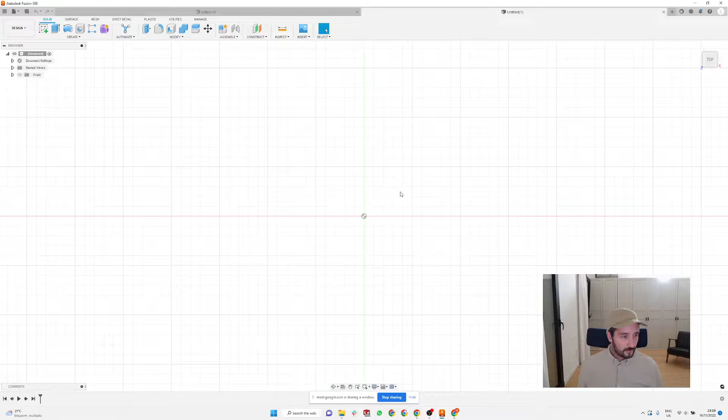Perfect, guys. So as I told before, I'm not really enjoying making sides, so I created a little bit of a system where I can just create one side, or several designs eventually, and quickly modify them so I can have a different width, different hinges, different length, and basically make it as fast as possible and play with the fronts, because that's more fun.

So we're gonna start as usual. I'm always starting with my stock material. I always need to know how big I can make the sides and if they will fit the material. So I'm gonna start here with a sketch, put it as usual on that little square, and create the rectangle in the shape of the stock material.

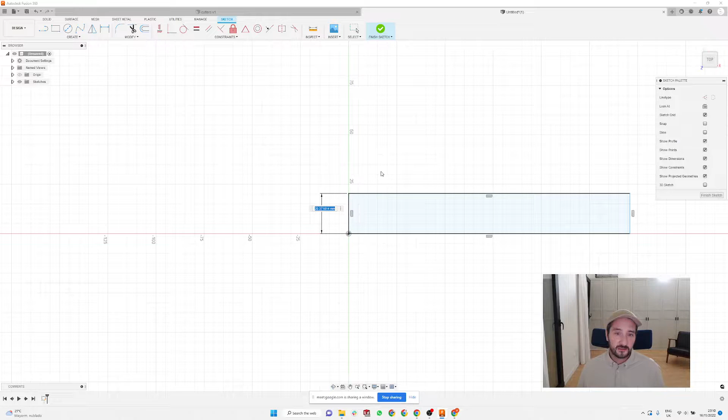And because I'm always choosing material in a 20 mil or 30 mil width, I'm gonna make that one 20, and most of the time the length is 160, because that's most of the stock material I'm receiving, so it's 160 to 170. So let's start with 160. So this is gonna be my stock. I'm gonna extrude it just literally almost nothing, like a film, so 0.01, and I'm gonna start playing with this. So on this one I'm gonna create another sketch.

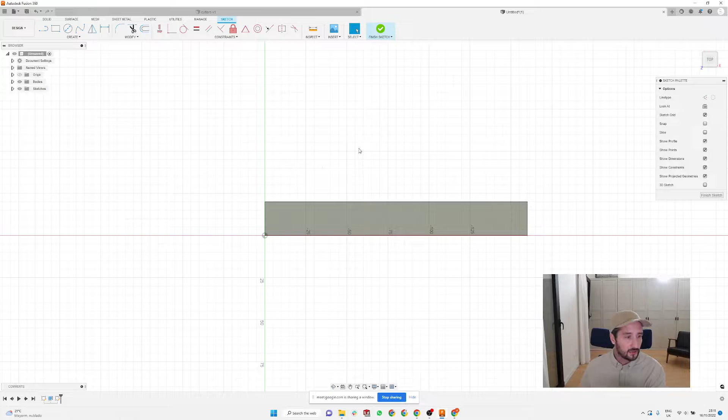It depends what kind of arms you're doing. So I can first show you arms that are symmetrical, so you can basically cut left and right the same shape and then just do a different engraving. And then I'm going to show you how to make arms which are not symmetrical, like the Ray-Ban arms with that little hanging bit underneath the arm. So this is going to be the symmetrical one.

And I'm always starting with a center line. So I'm going to select the line here. And if you go along this edge without pressing anything, when you are close to the center, it's going to show you that little triangle. That means you are in the center of the line. And I'm going to create this horizontal line across the whole stock material.

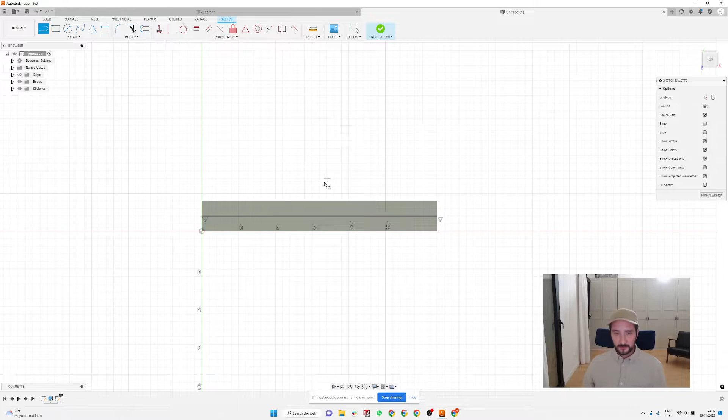Normally, when I'm doing some simple arms, I'm just doing this kind of shape: I go straight, then go a bit lower under a certain angle to taper the arm, then go straight again, and then create some sort of end, like the tip of the arm. So let's say something like this. All these 1, 2, 3, 4, 5, 6 lines were done with the line function.

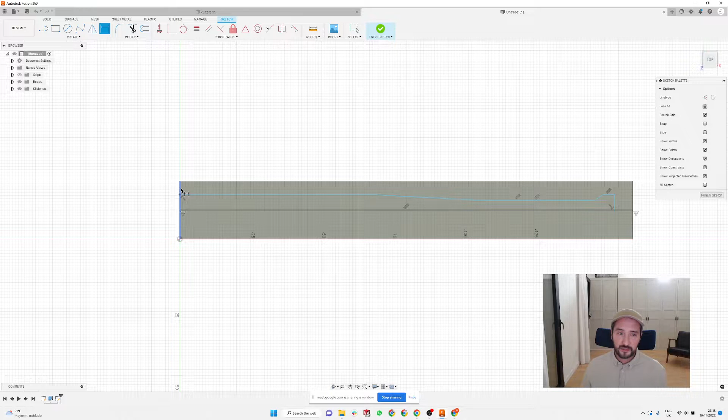This sketch is going to be quite complex, but it's going to be super easy to modify afterwards. So we're gonna put a lot of dimensions to it, and you can easily change them by just typing a different number. So normally I will go to the function sketch dimension and first say that this straight line I want always, let's say, 50 millimeters.

And then I want the area where it's tapered and thin, where you start bending the arm. I'm normally doing this from the point where it starts to be tapered till the end of the arm, usually 50 millimeters, so I have a little bit of space to bend it and have approximately 35 millimeters maximum for the hanging bit behind your ears. So this is going to be 35. Sometimes it moves a little bit when I do the sketch for the first time, so I can just move it back like this.

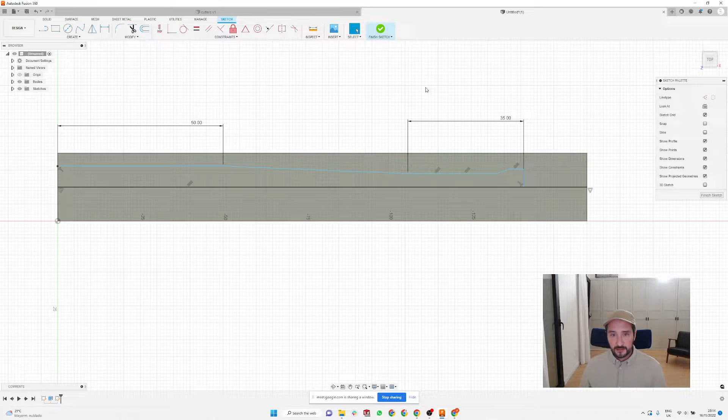And now I have the beginning and the end locked, and now I will create half of the hinge. So here I'm gonna create just 3 little lines. This is gonna be the half of my hinge. And eventually when we do the mirroring, I'm going to show you how to give this dimension. So this is kind of the super basic shape.

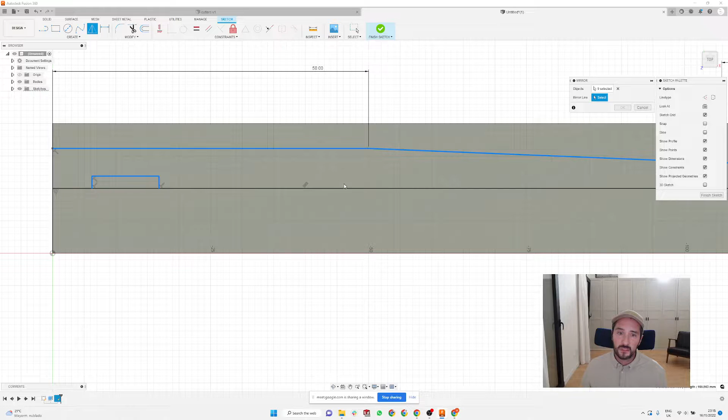And now I will do the mirroring. So this is the mirror function, and I'm going to select this line, this line, this line, this, and these three lines on the hinge. And my mirror line is going to be the center horizontal line.

So it's going to help you to visualize how the arms are going to look, and you can still, just by dragging these points, change the size, or you can go to sketch dimension and select this line and tell it that you want this to be, let's say, 10 millimeters. And it's always going to change the width, and it's going to be perfectly centered. So if you have the wire shoot in the center, there's no chance that the wire is going to be on the top or the bottom.

Then I'm going to select the tapered area, which needs to be quite thin, because if it's thick, it's quite a pain to bend it behind the ear. So normally I'm doing something between 5 and 6 millimeters, because that's the easiest to bend. So let's say 6 millimeters. And now this is like a quite long and tapered area,

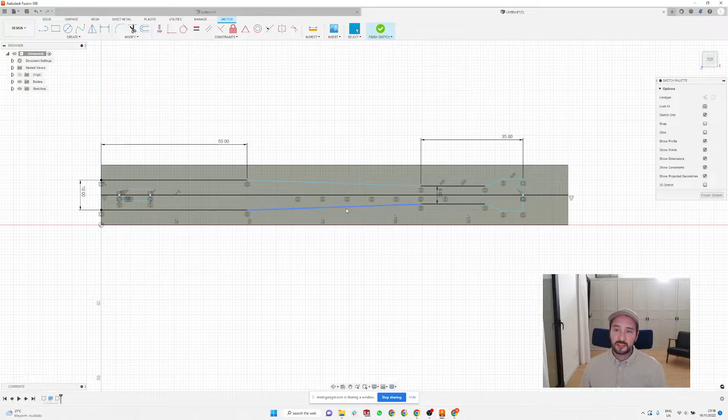and also here, we're gonna put the dimensions to the hinge. So I know the width of the hinge I want to use is gonna be 4 millimeters, and the length is gonna be, let's say, 8. Normally, if I have a stock like this, I'm always keeping the start of the hinge 6 millimeters from the end of the arm, so I have a little bit of area that I can do the mitering afterwards. It's quite important to have the hinge locked like this.

If you see that it's all black lines, it means that it all has dimensions.

Sorry, I'm gonna mute them. Sorry.

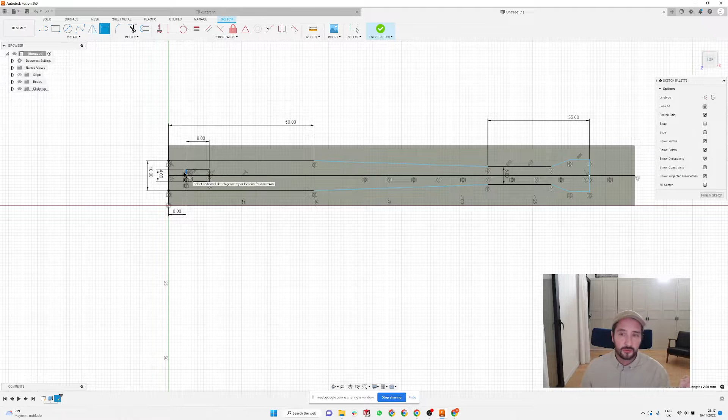And yeah, so now basically the hinge is locked in place, and from this point I can change the overall length of the arm. As you know, normally that little number of the length of the arms is measured from the beginning of the hinge, or from the screw, till the end of the arm. So I can make this dimension and put, let's say, 140.

And now I'm basically in a position where I have one design of the arm, and if I want to change it for a different frame, and I know it's going to be a small frame for kids or for ladies and it needs to be shorter, I can literally just type here 135, and it's going to change the size. So you can always play with this kind of stuff. And also, if it's gonna be a frame with a smaller lugs and it doesn't need to be 10 mil, you can just change it to 8 here, and all these things are always gonna be locked.

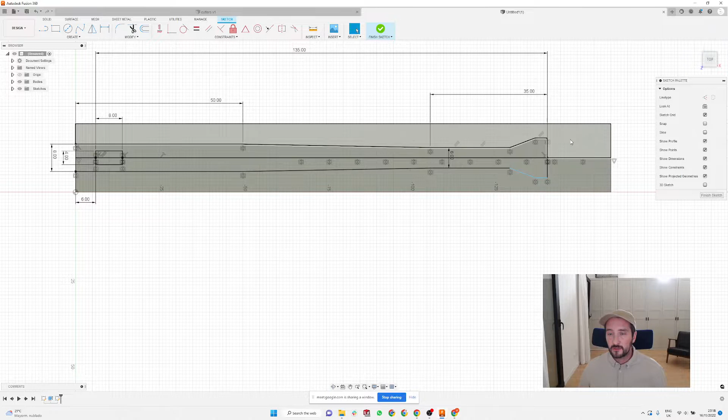And if you want this end of the arm to always be the same size, you can just add a few more dimensions here, to, let's say, the width of this end. I want this to always be 8, and the overall length of this bit I want 6. So now if you change it to 145, it's just gonna always stretch the arm and nothing else will change.

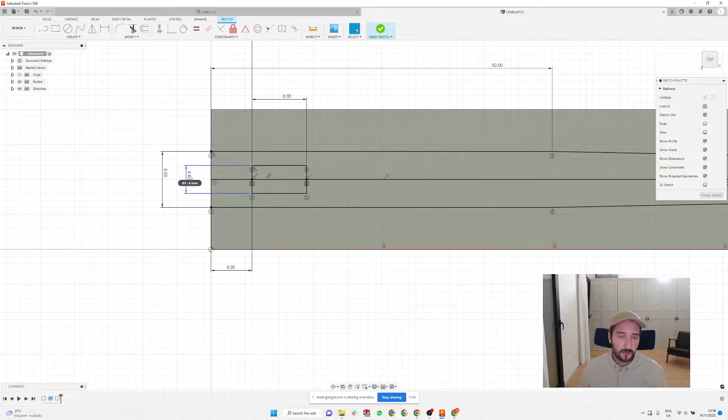So you can play with literally any size, and it's just changing one number, so you don't need to design much. If you want to use a wider hinge, instead of a 4 mil hinge you can use 5, and just change it again with one number. So the more you play with this sketch, the easier it's gonna be to modify everything.

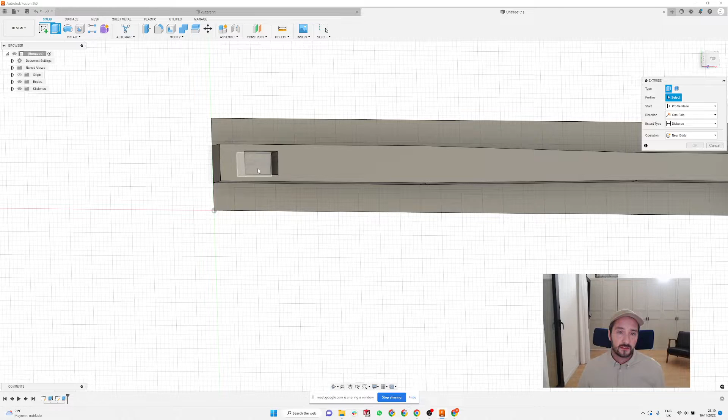Now we're gonna go to extrude, and we're gonna extrude this arm. So I'm gonna select the arm itself, and it's gonna go 4 millimeters high, like this. And this is the recess for the hinge, and I'm gonna add 3 millimeters because I want it to be slightly recessed. I'm gonna use the fillet function here and make the rounded edges, so it looks more like a recess for the hinge.

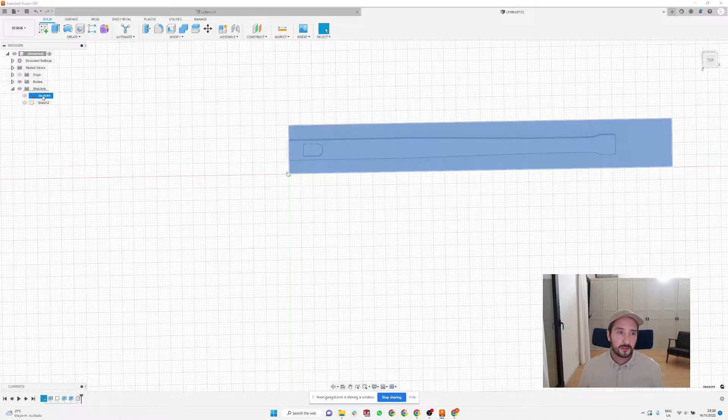So now basically you have your arm, and if for example you have a collection and you want to use different fronts, or the same fronts all the time, you can just modify it according to your frame. Just go back to your sketches here. So let's say this is going to be the stock and this is going to be your arm design.

So if you edit the sketch again, you can just change, let's say, this to 4 millimeter, or let's say 4.5 mil, and it's going to change that. Or if you want to change to 145, it's going to give you this length.

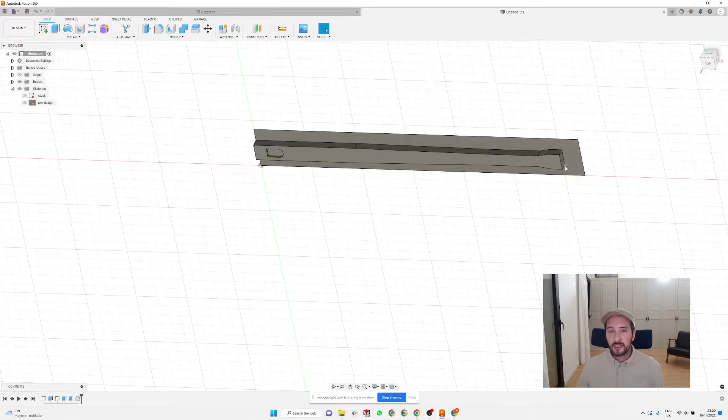You can play with all these rounded edges in your first sketch, but you can also do it here in a 3D operation. So you can make the edge here and here rounded, and don't worry, even now it looks like, because we make quite a harsh transition just with the lines, you can see now that it doesn't look very smooth, but when you actually make the arm itself, it's going to end up being absolutely seamless, this whole connection. So you can see it now, but eventually it's not going to be visible at all.

So that's one thing, how you can quickly design your arm. I'm going to now show you the next steps, how to prepare yourself a G-code for this. And the best way afterwards is to basically create one design of the arm and then copy the whole thing and redesign it, and create yourself a library of different designs, and then you can just design the front and find the best arms that will fit the design of the front, and then just choose it, modify the width a little, modify the length, modify the hinge, and you have everything else immediately done.

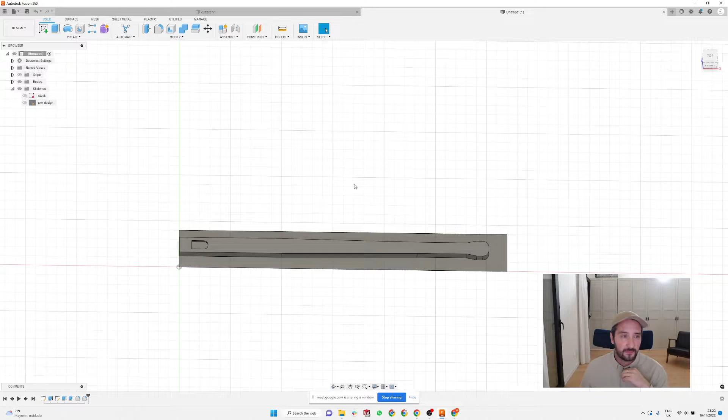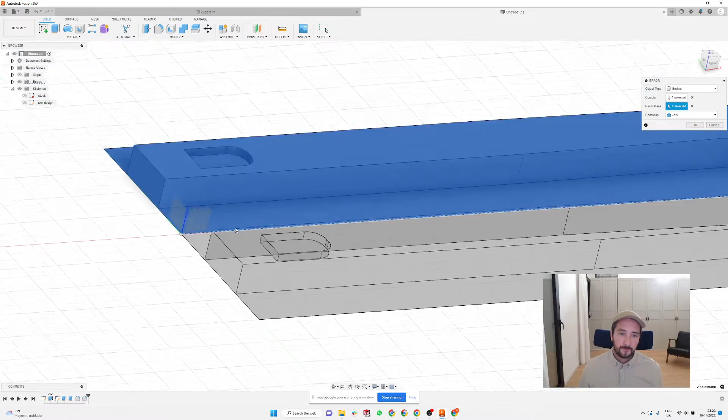So this is basically one arm, and normally I'm making them both, because I'm gonna have an engraving on a left and a right, so it's best to have two of them. So normally I go here to create, and mirror the whole thing. So press mirror. It's asking me here to select the body. I'm gonna select this, and the mirror plane can be actually this plane, or if you zoom a lot in, you can just click on this edge, and that's going to give you the mirror side.

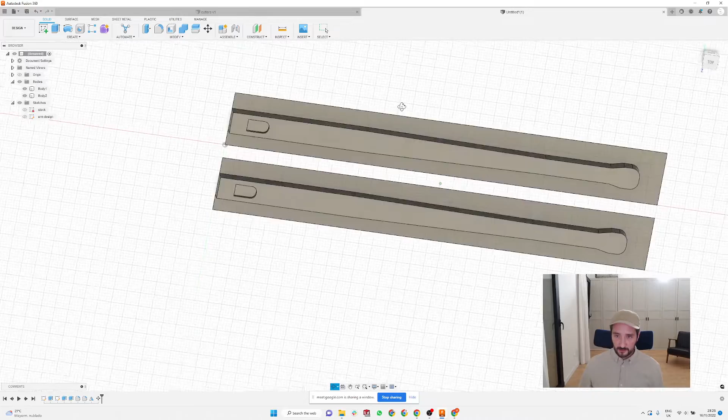Just here, when it's asking you if you want to join the operation, say that you don't want to join it, you want a new body, because you just want to have them separately. And you have a left and right, and normally I just don't like when they are touching each other, so I go here to bodies, select the second one, and go here to modify and move or copy, or you can press M and then just make a little gap, but you don't need to do that. But I just hate when I cannot see the gap between them. So at this point you have your 3D model, and we can now go to manufacture.

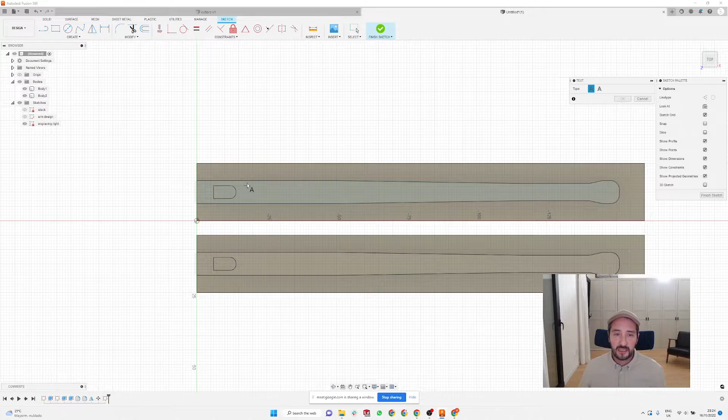I'm gonna first show you how to do the engraving. We need to create a new sketch, and we're gonna put it on the top of your arm here. Let's say on this right one. So it's gonna be engraving right. And here, if you roll down the create, you have here the function text. So now it's basically asking you to create a little box. So you just create some box here, and you can type here whatever you want on your arm. So it can be, let's say, brand name,

and here you can choose the font. It's basically linked to your computer. So whichever fonts you have in your computer, you can use that. So if you already have a font for your brand, you can just choose that, or you can choose from thousands of fonts here. I can choose just a normal Arial, and here you can choose the size of your font.

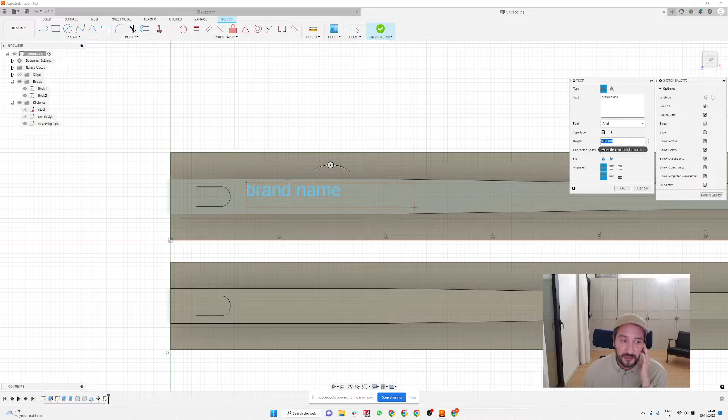Normally I'm not going smaller than 2 mm for the engraving, because it's a bit tricky when you do it on CNC. Anything smaller than 2 mm is going to be slightly distorted and it's not going to be very crisp. So for me, 2.5 is kind of the best size. And if you press OK, you can just drag it wherever you want on your arm. There's probably a way to mount it exactly in the center, but normally I'm just eyeballing it where it's approximately in the center, or where I want it.

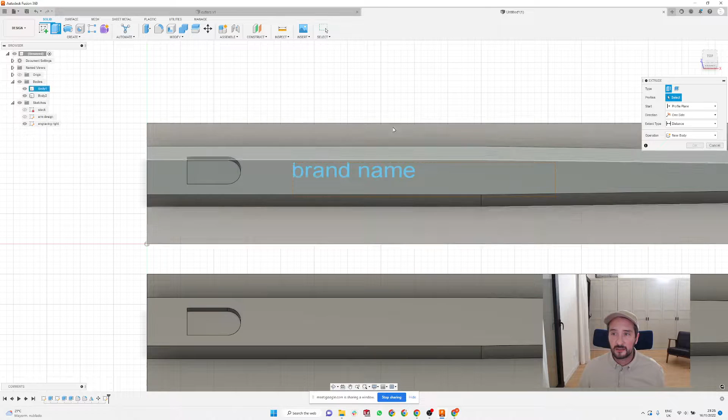And now you go back to solid and press extrude, and basically make that whole engraving. You need some depth. So I'm gonna extrude it minus, and normally I'm doing 0.4 deep, and that's gonna give you the engraving for your right arm. And normally on one arm you have a brand name, on the other one you can have the size, or it can be the name of the frame. So we're gonna create another sketch and put it on the top of this arm.

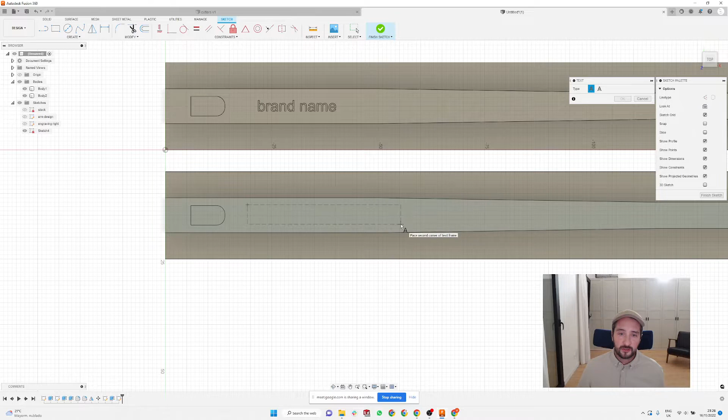Again, here create text, and you're gonna create your box, and let's type frame name. Again in the same 2.5 mm, press OK. But because it needs to be mirrored, the best way to do it is double click now on your engraving, on this text, and you can see here this little ball and a circle. So you just do a 180 degree turn, and that's gonna give you the engraving for the other arm. So now it's gonna be properly left and right mirrored.

And you can do here extrude. Just click on a text till it's blue like this, and minus 0.4. You can always modify the text. I'm gonna just type it here. Engraving left.

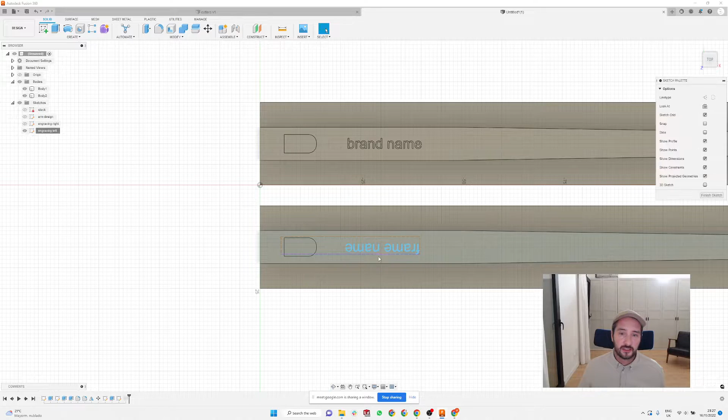So if you want to modify it, here you have those two sketches. So you can go here, edit sketch, and you can just type whatever you want, and it's gonna make the same extrusion again. So if I type frame name number 2, press OK, and finish sketch, it's gonna make the whole extrusion with the whole text. The only thing that you need to do when you're changing the text, you just need to again drag it somewhere on the arm where you actually want your engraving. You can have it normally here next to the hinge.

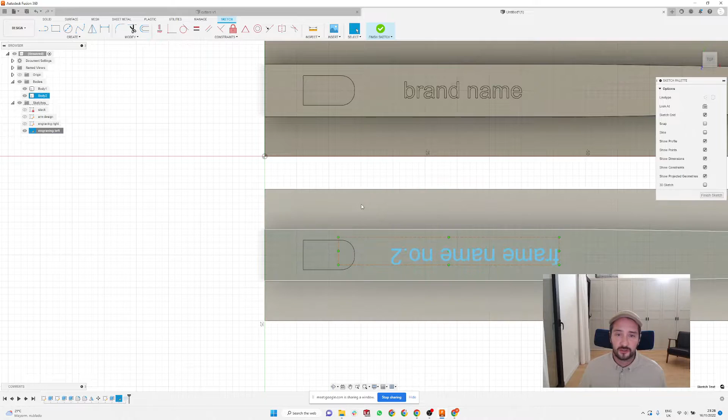I always recommend you to have at least 5 or 6 millimeters away from the hinge, because when you're cleaning the engraving, or if you fill it with paste or something, if it's really close to the hinge, it's quite hard to clean it, and sometimes you're gonna scratch your hinge, or it's a bit tricky. So I always like to leave a little bit of gap from the hinge. And that's basically it. That's how you can make your arms and the branding.

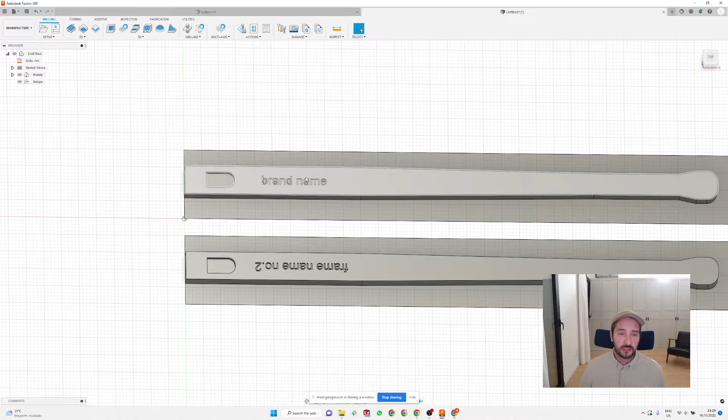And now we're gonna create data for CNC out of this. So you're gonna go from design to manufacture, and we're gonna create 2 setups, one for each arm. Even if it's symmetric, you don't need to export the G code for cutting separately, because the cutting and the recess for the hinge is gonna be the same for the left and right, but you need to export different G codes for the left and right engraving. But I'm gonna show you how to do it.

So we're gonna create a new setup, and automatically it will select everything you have in your work area right now. But you just want to work with the one arm. So here in the model, you can select just one body. So you just press select and click on one of your arms.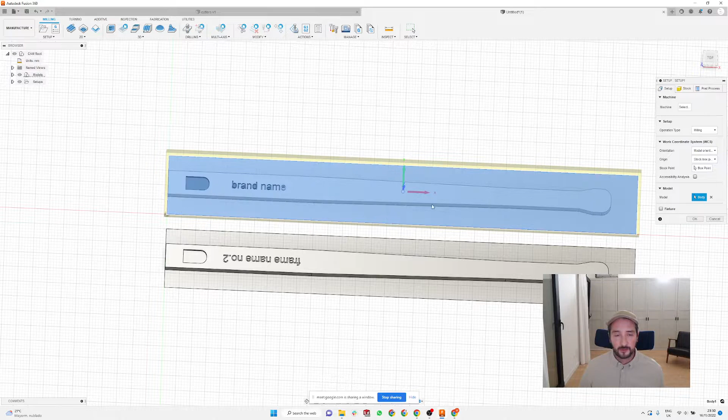And normally it always jumps straight to the center of your material and the center of your arm. My recommendation is, if you're doing arms, don't start from the center, because first of all it's kind of hard to find the center of the arm. I'm always starting on a left edge. So here you have an origin, and if you roll it down, you can click here on the model point box, and it gives you a few different points. It's usually the corners, top, center and bottom, and the centers of every single side. So my point is always on the edge and the center of the arm.

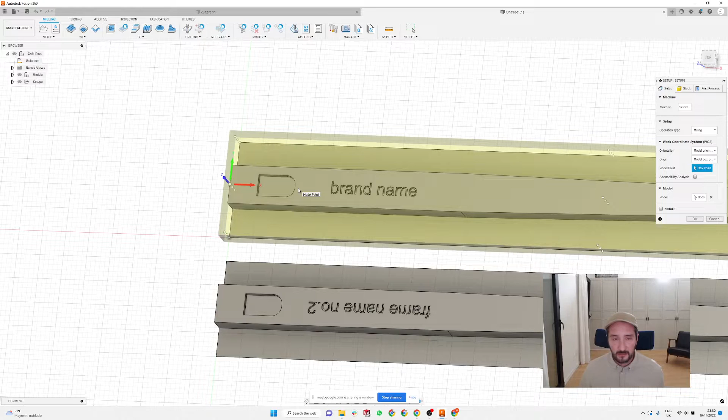I found it quite useful, because quite often when you do this yourself and you don't have every single arm the same length, or you don't have the same length of material, if you set up this point, it doesn't really matter how long your arm is going to be, because you're going to have more or less material at the end of the arm. So I recommend you to always click here.

If you go to the second tab here, stock, it's recommended to always have a little bit of extra material, but you don't need that. So instead of 1 and 1 here, you can have 0 and 0, and you can see the stock dimensions of the material. It's 160, 20 and 4.01, so basically 4.

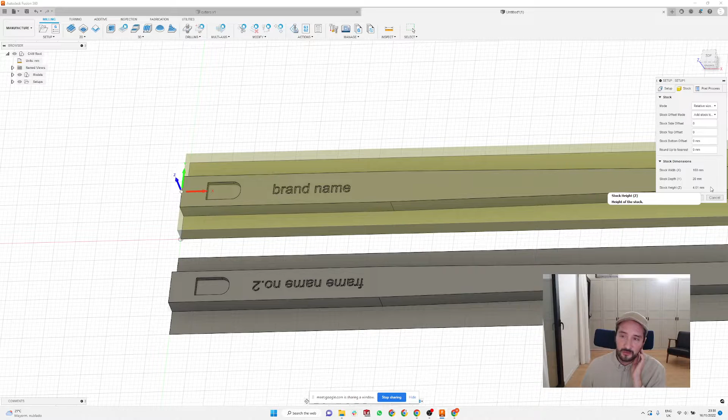And that's it. Now you have the prepared setup, and now we're going to do the operations for milling of each of these things. So we're going to start with the hinge. For the hinge, I'm using the function 2D pocket. So we're going to click on that.

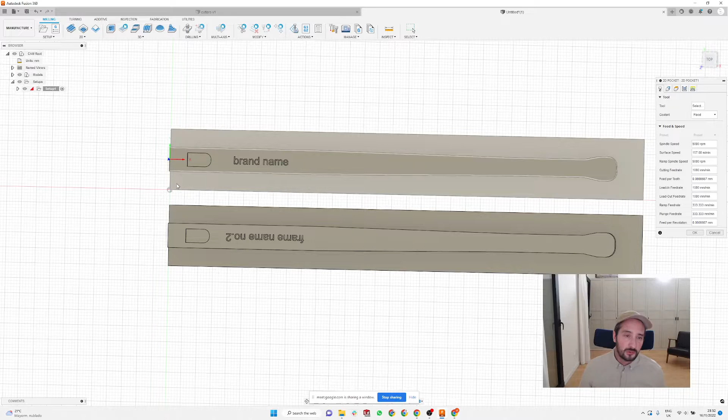The same way like we did the front, we need to first select the tool. If you want, you can use the same tool that you are using for cutting fronts, which was 1/8 inch or 3.175. But normally I would recommend, if you're cutting arms, go for the smaller cutter, because if you have a 20mm material, you need to have space for the cutter to actually cut this shape. You cannot fit a much bigger size than, let's say, 6mm, because you need to have 2mm on the top and on the bottom. So I would recommend you use a 2mm cutter.

So we're going to press here on tool and create a new tool. It's going to be again the flat mill, and here the diameter is going to be 2mm. The rest of this information is not really important. Shaft not important, holder not important. For the spindle speed, if your CNC machine communicates with your G-code about the speed of the spindle, I would put at least 10,000 RPM.

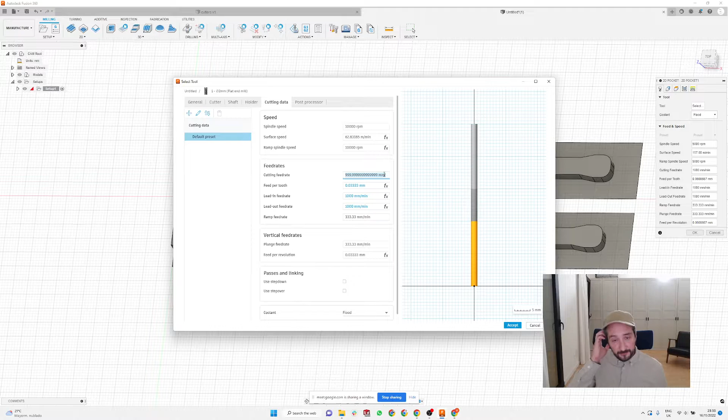And the cutting feed rate, with a 2mm cutter, I'm usually doing something between 500 and 1500 millimeters per minute. So let's be a little optimistic and put, let's say, 750, and the rest is automatically calculated. So we can use this tool and select, and here in the geometry it's asking us what we want to cut. We want to tell the CNC to cut on the bottom of this recess for the hinge. So it needs to be filled with blue and with a blue outline.

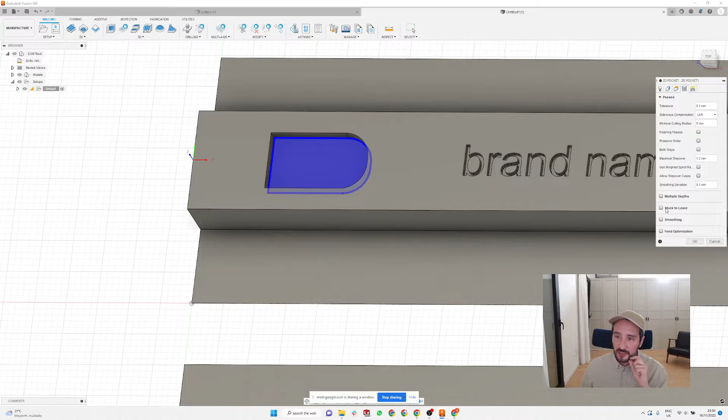The heights are not important in this operation, and for the passes, just be careful, because every time you use the 2D pocket function, it always gives you stock to leave. So I would unclick that, because stock to leave is basically going to make it 0.5mm less deep and 1mm overall smaller. So I will just delete it completely.

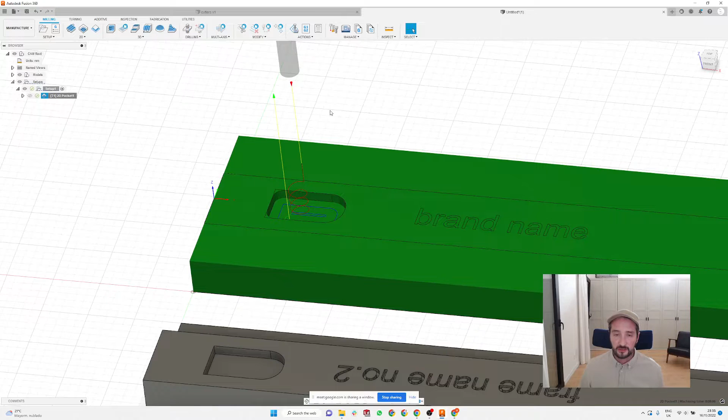And here in linking, there's one annoying thing: it automatically gives you a helix, which means the tool is going to go down very slowly into the material. I'm going to show you. You can see that red line is going very slowly down. It takes absolutely forever and it's annoying. So if you go back to edit, you can keep the helix but change the ramping angle from 2 degrees to 10 degrees, and it will go down much faster without potentially damaging the material or tool. So that's the function for the hinge. It's very similar to what we did on the front.

The next operation would be cutting the outline of the frame of the arm. For that I'm going to use the same 2D contour that we were using for the lenses and for the outline of the frame. We already have the 2mm tool, that's good. We have 750 speed, that's okay. And now I'm just going to select this line.

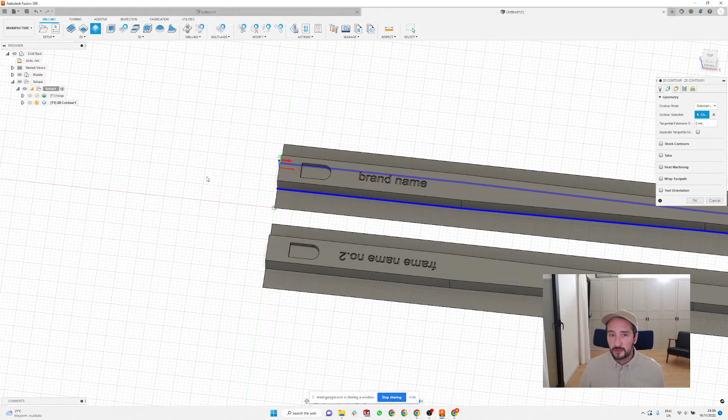As you can see, normally if you didn't have this stock material on the bottom, it would also cut here on this edge, which is tricky because normally you have the wire here, maybe a little bit sticking out, and most of the time you will break your tool in that area. So if you have stock material and you click on the outline of your arm, it's just going to cut on the top and the bottom and around, but not here on the front. So it's very safe for cutting.

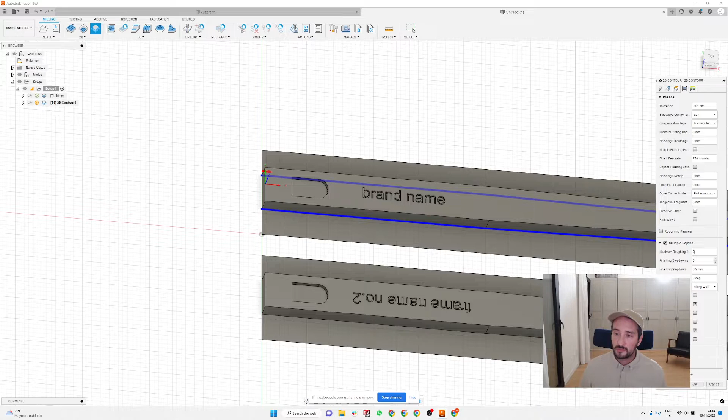And with the passes, I will go multiple depths, as it's a 2mm tool, I wouldn't go deeper than the diameter of the tool. So I will go 2mm deep for each pass. As you can see, now we have 2 passes and it's always stopping on the edge of the material. For me this is quite important because I don't want to break my tools.

And the last operation here is going to be the engraving. If you don't have a CNC with automatic tool changes, I would recommend you create the code for the engraving now, but never export all the operations at the same time. If you start cutting your arms, just cut them all out and then do the engraving afterwards, because if you need to change tool every single time between arms, it's going to take you absolutely forever.

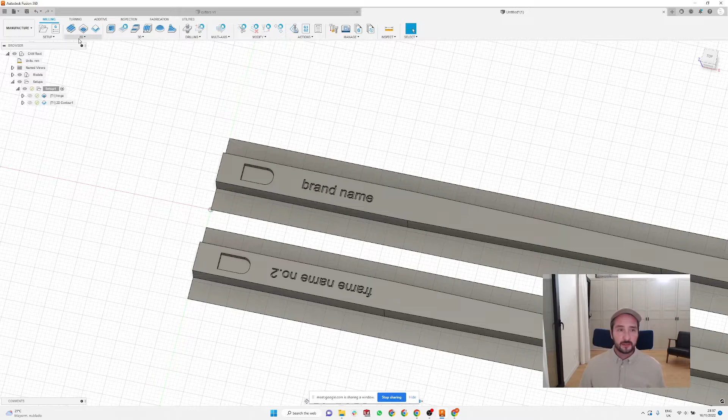And with the engraving, it's a bit tricky because Fusion is not recognizing this kind of operation as engraving, so you need to convince it a little bit that you actually want to do engraving, and you need to set up a new tool for that. So we're going to use the same operation as the hinges. It's going to be 2D pocket, and we need to create a new tool. So we're going to press here select and create a new tool.

And then just quickly before, for engraving I'm using these kinds of tools. These are very simple and super cheap engraving tools for any materials, for metal, wood or aluminium. I can recommend you to get this one, which is flat on one side, and the angle of the engraving tool is 10 degrees and the tip is 0.1 millimeter. So it's one of the smallest ones you can get.

If you look at Amazon, they are that cheap. I recommend you to get a lot of these, because every time you make even a tiny mistake, or if you want to find the zero Z, you can very easily break them. So they are quite fragile. But Fusion doesn't have this tool; you cannot create this tool in the library.

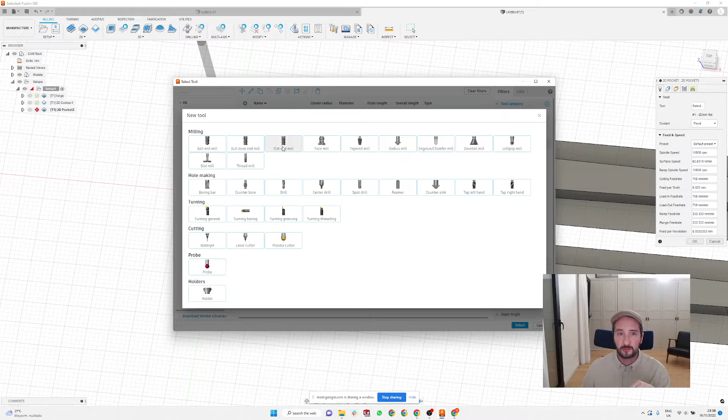So I'm going to go back to 2D pocket, select, and instead of having the tapered shape, I'm just going to create a flat mill. Fusion will think that it's just a tiny straight mill. So I'm going to use this and tell Fusion that the diameter of the cutter is going to be 0.1 millimeter. And you don't need to care about the rest of these numbers.

For the cutting feed rate, it all depends how good your CNC is. If you have a very rigid and very accurate CNC, go fast without any issues. But because it's going to cut such small areas, it's better to go slower, because you're going to get more accuracy. So I would recommend you to go 500.

And also for the speed of your spindle, because sometimes it happens with different materials, for example, if you have a black material and you do engraving, because it has a lot of pigments, it starts melting the material instead of cutting it out. It looks like it's cutting your letters nicely, but it's actually just melting the acetate right behind the cutter, so you cannot clear out the letters afterwards. So I would recommend you to go around 5000 RPM, not faster, to prevent the melting of material.

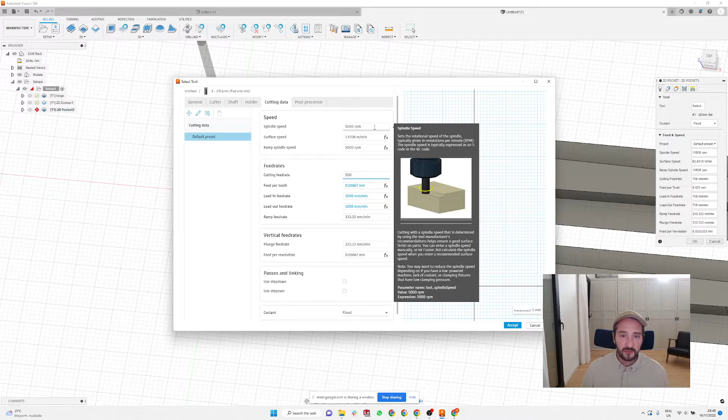And that's it, you can accept. And we can now select, instead of 2mm, the 0.1mm cutter. And we go to the second tab, and we need to select every single letter, which is a bit annoying, but it doesn't take forever. Just be careful when you're selecting the letters.

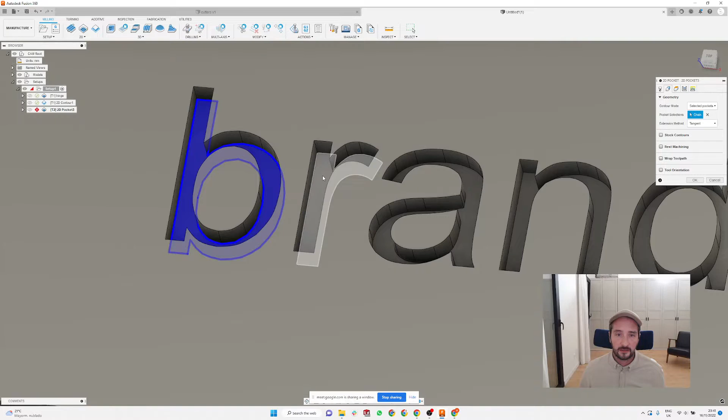Always be careful not to select the top edge of the letter, but always click on the bottom of the letters. So basically where you want your cutter to cut, always select the bottom. It's quite visible, because if you click on the top edge instead of the bottom, it's going to look slightly different, so you can see it immediately. So I'm going to do it again. And you just select all the letters.

And here there's one thing that I would recommend, because it's a 2D pocket, it automatically also leaves some stock. So you need to unclick that because you don't want that. And for linking, if you have a typography with very thin letters, it's always good to remove leads into the material. So unclick lead in and lead out completely, so it will go straight to the letter and start cutting. It's just a little tip that will help you a lot.

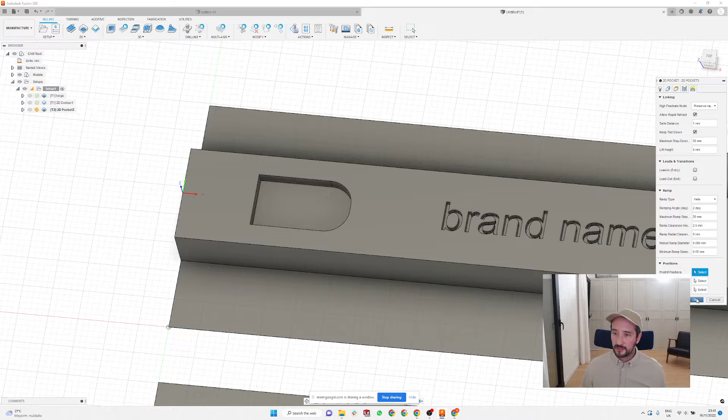And if you press OK, now you can see, I forgot here, same as on the hinges, there's a ramping of 2 degrees, but you can change it to plunge, so it will go straight down into the material. And now you can see that it's clearing all the letters nicely. It's making more steps to clear it, but I realized, especially with black and very dark colors, it's good to have all these steps, so it's going to look nice and crisp when you cut it out.

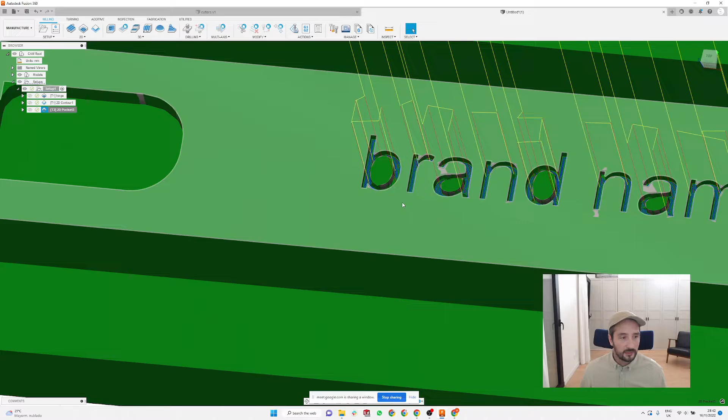So that's basically engraving, and it's right here. There's one trick I can show you. You can see it takes quite long, because it always cuts one letter and goes all the way up and then down, all the way up and down. So all these yellow operations are taking absolutely forever.

So if you go back to edit the operation of engraving, here you have the heights. We never so far opened that tab. It's basically telling you that between the steps in the letters it's going to go 5 mm up and down, and between the letters it's going to go 10.

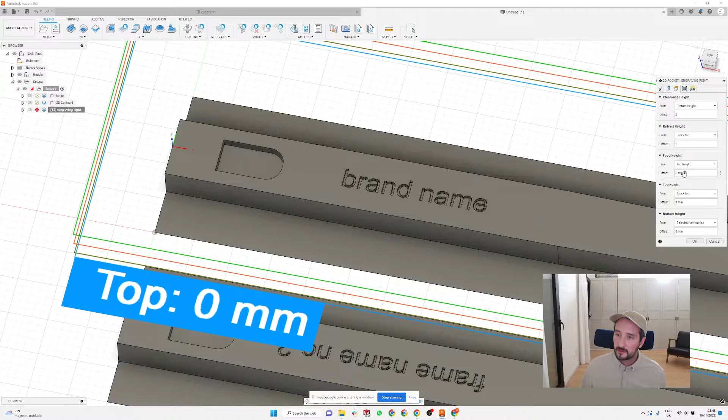So normally I'm changing this to 1 mm, or let's say 2 mm. Here I'm going to change to 1, and 1, and here, the clearance height, I'm just going to change to 1 mm. So it's now going to do literally small jumps between the letters, and it doesn't look like a big thing, but this can save you 3 or 4 minutes on the whole process of engraving. So you can go from 7 minutes of engraving to 3 or 2 minutes.

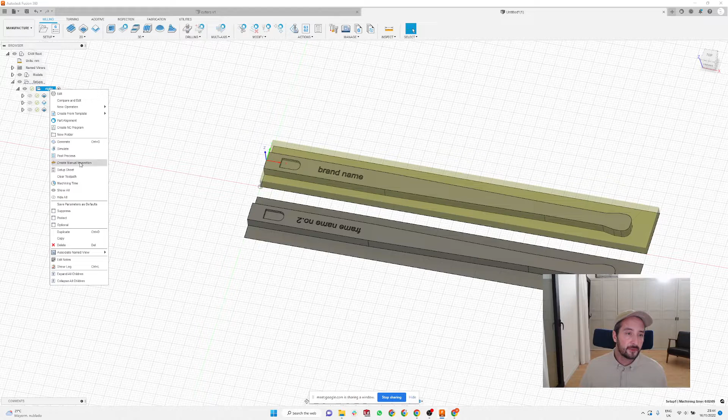So now basically we have the whole right arm done. And because you need to do the other one also, I'm going to rename this one right. And if you right click on this whole setup, you can press duplicate. And you have here now basically the same setup, copy paste. So I can rename it to left, and I just need to right click, edit, and tell it that we're not going to use this body anymore. So I'm going to delete this, and tell it we're going to use this one.

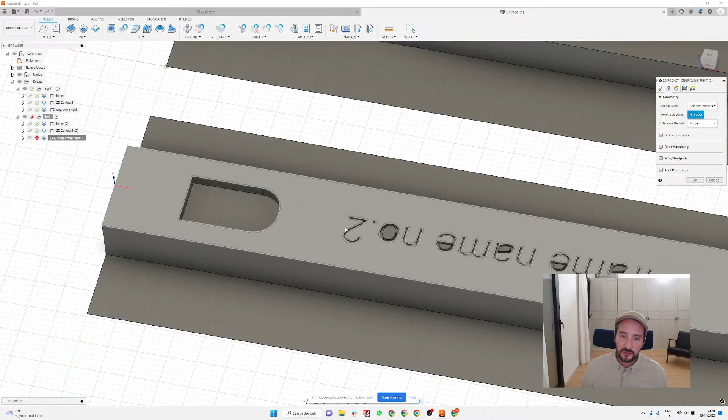And here again, edit. It's the same thing like when you're copying the setup for your front on another frame. You're going to select the geometry, delete the old one, click on the new hinge. That's done. Then you have a contour, again, geometry, delete, and click on the other contour. And with the engraving, the same thing. Click here, geometry, delete, and select all your letters. Here, here, here. And you have the engraving for the left and right basically ready.

So from this point, I would use this as your template for arms, and every time you design a new arm, just do the 3D model and then copy all these operations, because you will know that these operations will work and it's not going to give you any issues. You don't need to play with all these setups that we did for engraving, like with the heights and everything. So you can always copy paste it.

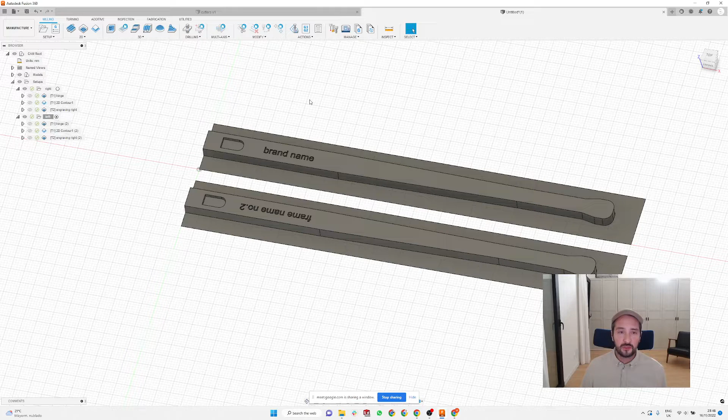And if you have a new frame, you can always copy the whole arm, both arms, as when you have here your materials. Okay, class number 5. I'm going to save this one as sides 01. Sorry, I think the screen disappeared, but I just saved it here on the left side as sides 01. And if I'm going to do a new frame and I know that I want the same design of the arms, I can just right click here on these arms, copy in the same folder, and rename it based on your frame.

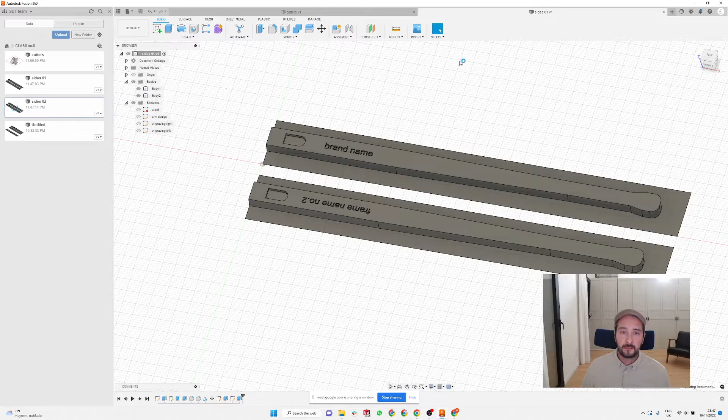Open them, and if I know that this is going to be the larger frame with the bigger lugs, I can just change it to 11. And I know I'm going to use 6mm hinges, and I have basically now a new arm that I would otherwise spend time to design. So at this point I can just take it, modify whatever I need, and if I go back to manufacture, I already have every single step prepared. So it's going to be much faster. It's going to take a while, probably a month, to get all your arm designs ready, but afterwards it's going to be super quick.

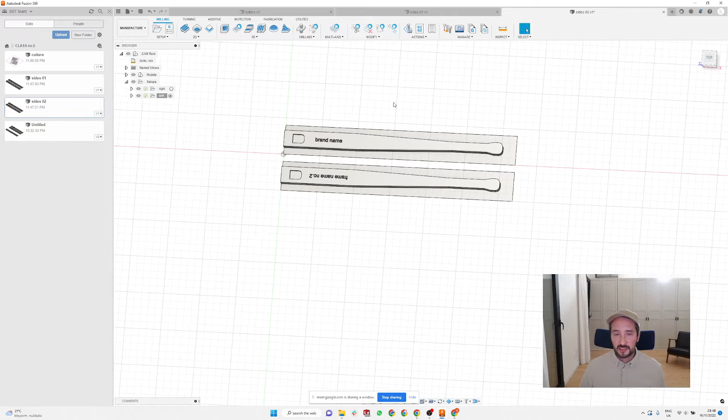So this is how I'm doing my arms. Sorry for this design, it's not exactly nice, but you can use your own designs and make something nice. And I'm going to show you now something a little advanced, when you want to do asymmetric arms. So I'm going to start with a slightly larger stock, and I'm going to use 30mm. So I'm going to create stock material for 30mm. So it's going to be 160 and 30.

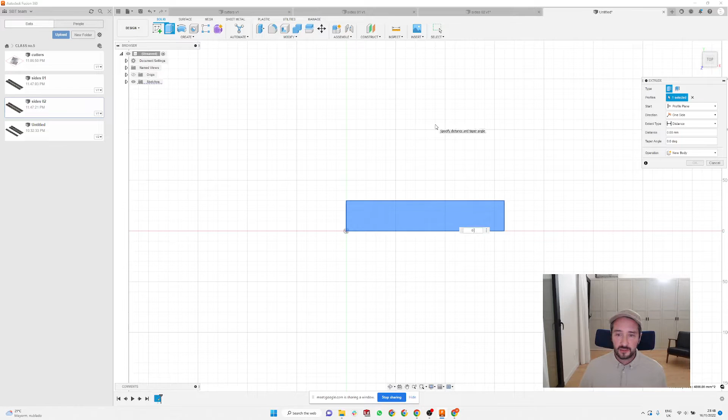I'm gonna extrude it 0.01 and create now another sketch. And start with the center line, and I'm going to try to recreate that like a Ray-Ban arm that has that little hanging bit.

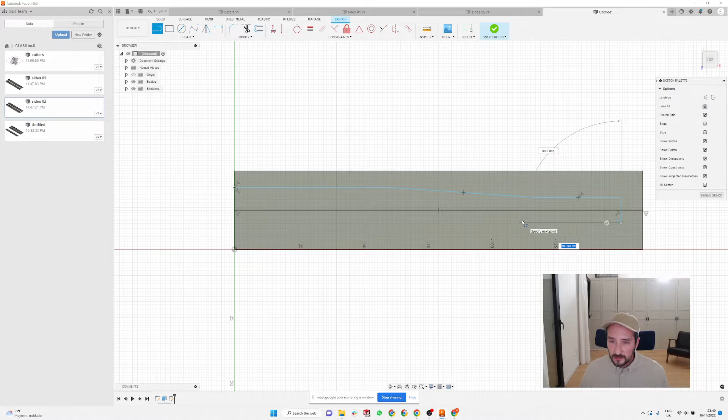So I'm going to start with a straight line, then do a little bit of tapering, and then let's say it's gonna be like a little, and I can make this straight and down. So I'm not gonna do mirroring now because it's not gonna be the same. I'm gonna make this longer than previously, and then this long hanging bit, and go back to the beginning.

So now it looks horrible, but I'm gonna show you one trick when you're doing this kind of stuff, and you want to use the same function when you just change one dimension, and it's gonna be perfectly centered according to your midline. So if you press here the sketch dimension, and you want this end of the arm to have 6 millimeter, you can make it 6 mil. But now, as you can see, it's not perfectly centered to your center line.

So there's a little trick. If you press again the sketch dimension and you select the top line and your center line, it's gonna give you some random dimension. But you can click on that dimension and basically create an equation, double click on the dimension, and then it's all selected. So you can now click on this dimension, and it now knows that it's looking at that 6 millimeter overall width, and you can just press divided by 2, and it's gonna center it perfectly.

So if you want to change it to 5, it will automatically calculate that this dimension needs to be 2.5. So it's a little trick that will help you eventually when you start playing with different shapes or more complicated shapes, so you don't make a mistake.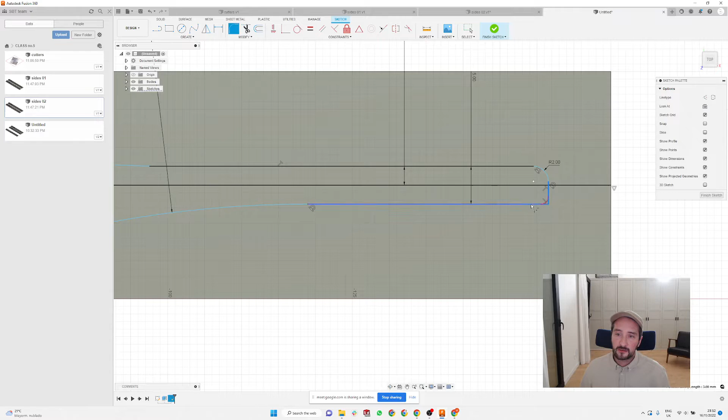Also, if you want this end with a radius, it's a bit tricky, because Fusion is not allowing you to do a perfect radius. So you can just make the fillet here, and then type 2 millimeter, and here also 2 millimeter, and it's going to give you that end.

We can make here the hinge, and again it's going to be a width of 4 millimeter and a length of the recess 8 millimeter. But as you can see, it's not sitting perfectly in the center, so I'm going to use the same thing. I'm just going to go from the top to the center and tell it I want the overall width divided by 2.

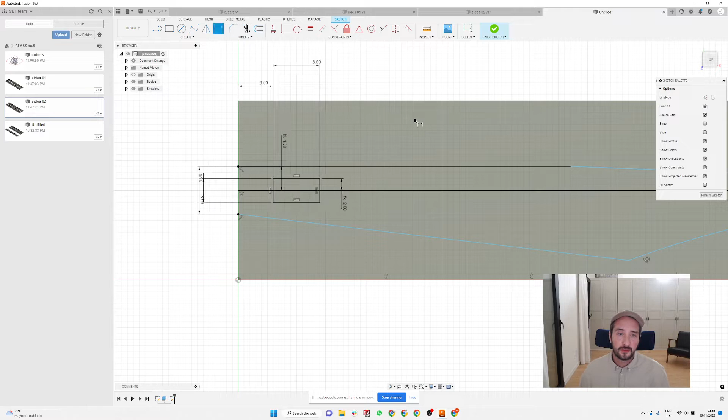Then best to put it 6 millimeter from the end of the arm, and here you can put the overall length of your arm from the beginning of the hinge to the end of the arm, 145. So this is going to be again all adjustable. So if you want to change the width, it's going to be this.

Sorry, I came out of the picture.

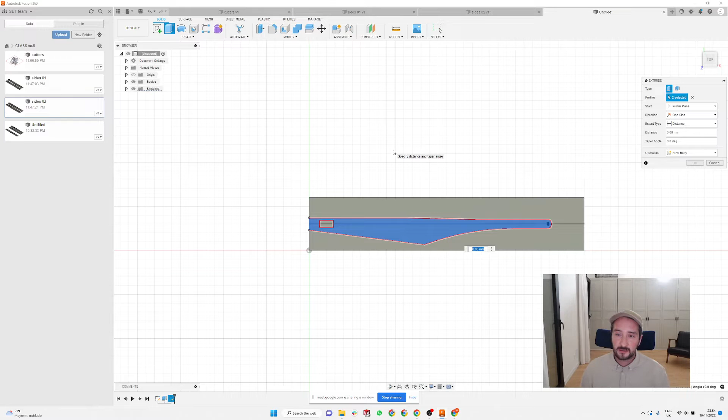So you can change it here to, let's say, 7 mil, and you want 135 overall. It's going to change the whole thing. And I can extrude it now. I can extrude this and this, 4 millimeter, and extrude this 3 mm and create here a little fillet.

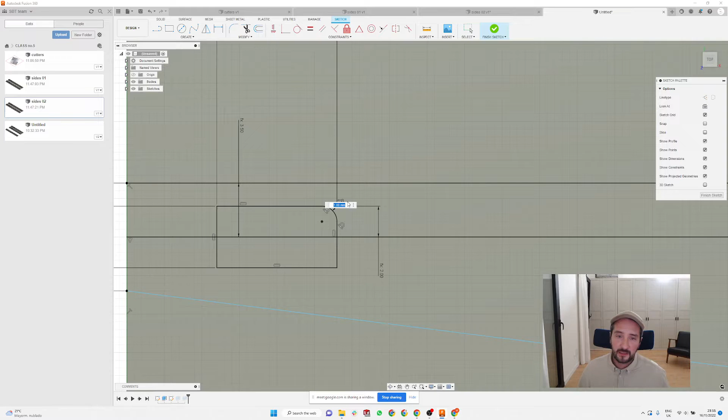But I would recommend, it's a bit tricky, or a bit more of an engineering bit, because you can do the fillet here, here and here, and you can also tell it that you want this fillet to change based on the width of your hinge. So you can press the radius you want to have. I'm gonna click yes, and then if I click on this again, I want this to be the size of the radius, basically half of the width of the hinge.

And the same thing here. Enter and then double click and then click on this dimension. But there's a problem, because Fusion hates connection of 2 radiuses. So normally what I'm doing here, instead of clicking just on this half, I'm just going to click on this half of the hinge, minus 0.1. And with this one I can click, I want the same radius here. So if you change it to 5 mil, it's going to change the perfect radius.

This is a thing that you don't need to use, and it's a bit into engineering to just have this quite annoying equation, but sometimes it's quite helpful if you want to change this all the time and you don't want to type different things and you just want automatically to change everything.

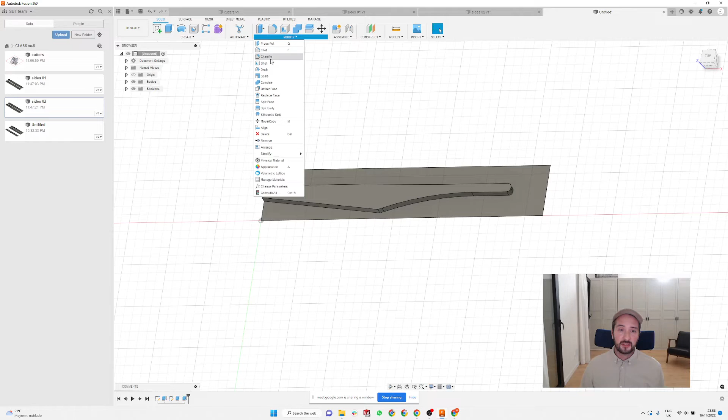So this is going to be your right arm, and we can do the same thing with mirroring, selecting the object. Plane mirror is going to be here, that little edge. And as before, I don't want to join them, I want to create a new body, and that's it. So you can just have this one, and I need to move them a little bit further aside.

And yeah, that's basically what I have normally in my library. I have 10, 12 different arms, and I'm not designing them anymore. I'm just going to choose the one from the library, modify it a little bit, change the engraving, and I'm done.

Any questions, guys? Or was it understandable, or anything that I can explain a bit more? What with the engraving? Yeah. It made sense, but I'm curious about the process with putting some paint in there, and then like, do you rub it off while it's still wet, or do you know anything about that?

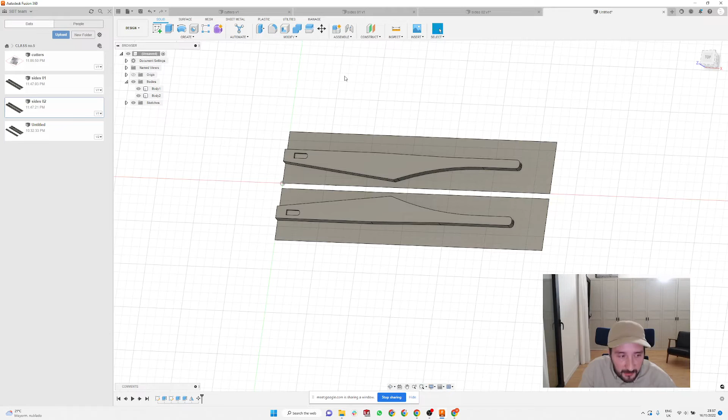Yeah, there's a few ways how to do it. You can buy a special engraving paste in France. They're making it in silver and in gold. It's usually quite good, and it's surviving quite well. But recently my mother-in-law had a frame that was made like this, and that engraving got completely moldy for some reason. I have no idea why. So I don't think that this engraving is actually safe for the skin.

So my process when I'm doing this engraving: when I finish the engraving, I just rub a little bit of what's called a dry paint stick, and I think they are using it for marking tires or marking some metals and stuff like this. It looks like a big ass... Like a crayon? Crayon. But it's good, but it's still quite soft.

So basically I apply this, then clean the surface, and then put a thin layer of super glue, which will basically create a nice hard surface, and it's safe for touching with the skin. And that basically seals the surface, and you can sand it, and you can still feel that this is kind of 3D, but the surface is going to be absolutely flat.

And would that survive barreling, or do you do that after? Normally I just put the crayon, then clean it, put the super glue, even with a little bit of layer on the top, and then put it in the barrels. So the little bit of the super glue will be getting off in the barrels, and you can just sand it a little bit afterwards when you're finishing the arms. Nice. Thank you.

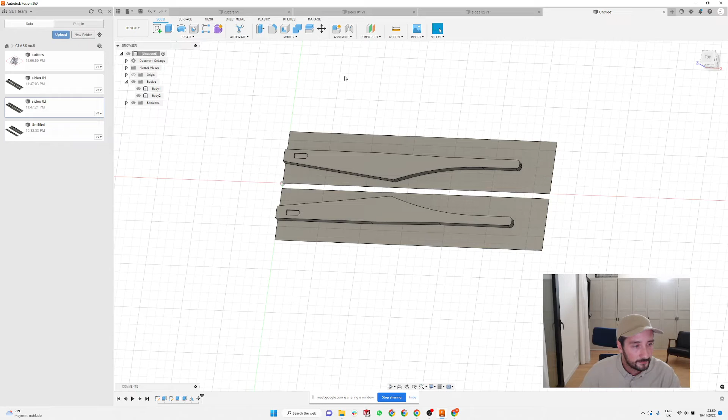We're also playing with Kenneth with the idea of using nail polish, which is a bit tricky because it looks really good. It's super easy to apply. It's surviving really well. The problem is that you cannot dip your arms in acetone before barreling. So you just need to cut your arms and then put the engraving and put them straight in the barrels. Which means that you sometimes need to do a little bit more sanding, because the dipping in acetone will get rid of some indentations and some scratches.

So it's not a bad process, and I'm still trying to figure out if there is maybe some other way. So I have now for testing a special acrylic infill paint that looks super promising because it dries really hard and it's super easy to clean afterwards. But I'm not sure how this will survive long term. So if you want an engraving that will really survive forever in place, just use the super glue and put a tiny layer over your engraving.

Great. Thank you. That's great.

No worries. I will be also ordering some UV cured paint, so I'll see how that goes and will let you know. Yeah, that's also good because it's also dry completely hard, so it's easy to sand it afterwards.

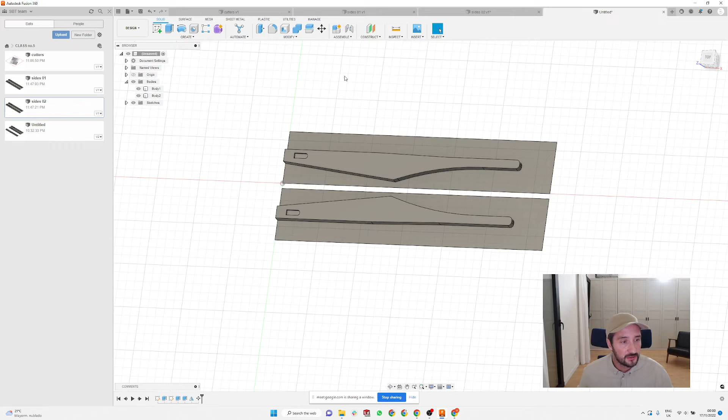I had a question just around how do you make sure that you get a nice fold in the arms so that they fold as close to the front as possible? Is that something you work into the design of the arms? Not really. I'm usually choosing the hinges that I know will fold nicely, and quite often the very important thing is that if you want to have a nice fold, it doesn't work with a flat frame. Normally it works much better if you have a little bit of base curve. It's always gonna fold nicely.

And also, if you have hinges which are riveted, you can always adjust them to have a perfect pantoscopic tilt to fit perfectly. And when you fold them, you can tilt them a little bit because they have a lot of play and they can be modified just a little bit. So you can basically push them till it feels nice and folds nicely. But I don't do any prior design work to make sure that they are folding nicely. It's going to be kind of a surprise at the end when I finish the frame if they are folding nicely or not.

Okay, gotcha. So more of a question of the curve in combination with the hinge. Yeah. There are definitely some hinges that I like. They look great on paper, that they're gonna look great and be super easy to use, and they are folding absolutely horribly. Okay, thank you. No worries.

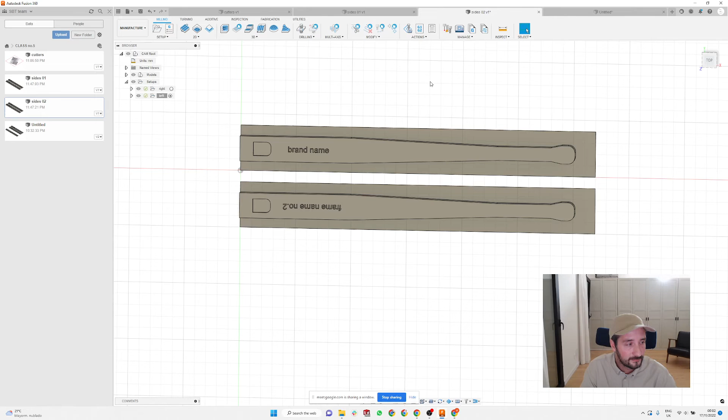And what about engraving a logo, like a graphic design format? Good question. Normally you just need to create yourself a new sketch. So if you have a logo and somebody already created it in Illustrator or you have a file, you can always import it in your sketch and then change the size and then do the same extrusion, like a minus extrusion, and then engrave it out.

So we did it, for example, when I was doing the sizing of the frame. As you know, it's normally the size of the lenses, then there is a little square, and then the bridge size. I couldn't find anywhere in the symbols a nice square, so I always made the square in another sketch, made basically two squares and extruded them. So for the logo, it's basically the same thing. You can always import anything, or if you have something that simple, you can just draw it in Fusion and then put it in a sketch.

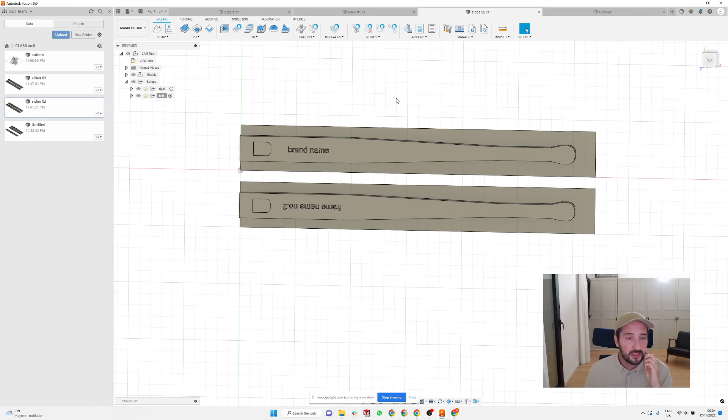Just wanna tell you not to spend a crazy amount of time finding the perfect font when you do the engraving, because the font is not gonna look exactly as it's right here. It's gonna look slightly different, sometimes a bit thicker, a bit thinner. So don't get crazy obsessed with the perfect font if you're machining the engraving, because there's no need for that.

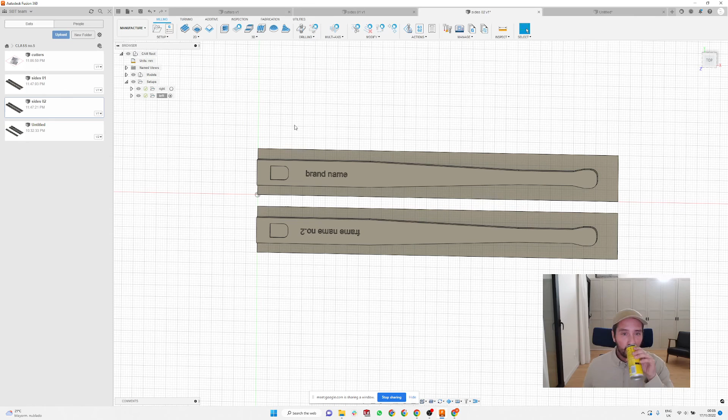Anything else? Yeah, okay. This is the way I'm saving time on arms. That was a great video. Lots of really good tips, especially for designing the arms.

Yeah, I'm gonna share these files with you on the group, so you can open them and see, because if you open the sketch it looks a bit messy, with a lot of numbers and everything. But when you start using it, you will know that you're changing this dimension and you change the size of the hinge, and you're not playing with anything else. Even if there are 10 more different dimensions, everything else will change automatically.

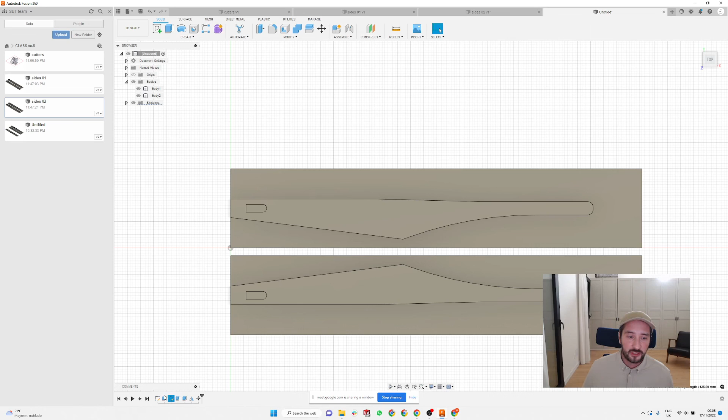So if you have more complicated arms, there are going to be more issues in how to sort out that if you change something, it's not going to mess up some other part of your arm. So if I pull this somewhere, it still probably works like this, but maybe if I go the other direction, something gets loose somewhere, and I'm going to completely break the sketch. But it's not happening very often.